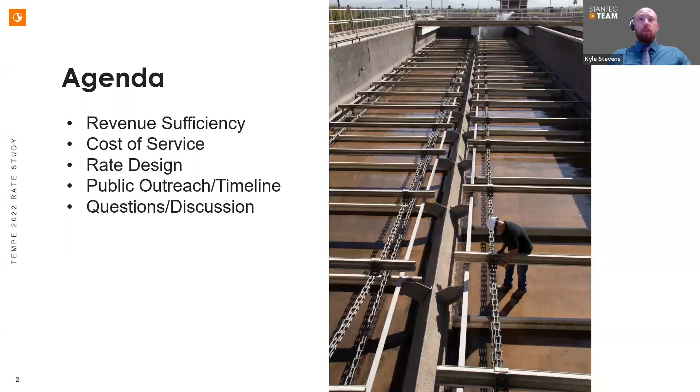Thank you so much for that introduction, Steve, and it's a pleasure to be here this evening. I want to run through a presentation we put together that really covers the rate study at a 30,000 foot view, and we'll dive into a few of the finer details. From an agenda standpoint, we'll be looking at the revenue sufficiency, cost of service, rate design, and then we'll cover the timeline of the rate study, public outreach, and then we'll open it up for discussion or any questions on the material covered this evening. So with that, I'll jump into it. This first slide really helps me tee up the issue of what is a rate study.

And I think one of the best ways to think about it is a series of interconnected investigations. So first, we're going to look into revenue sufficiency. That's a fancy way of saying how much does it cost? Water, wastewater, there are no tax dollars involved here. All of the revenues are associated with user fees.

And so we need to determine what are the total annual costs of running the system and also projecting that out over a multi-year period. So we'll be looking at 5 and 10 years into the future to see how those costs are anticipated to evolve over time. Once we've established that baseline, we'll move into the cost allocation.

And what we're really discussing there is from whom. So we have several customer classes set up on both the water and wastewater side. So examples are single family, multifamily, landscape, industrial, commercial. And what we want to do is look at the system's cost drivers and how those customers are impacting those cost drivers.

Next, once we establish the cost allocation, we'll go into rate design and we'll think about the different objectives that go into creating the actual rates and charges that show up on a customer's bill and generate that bill to collect the revenue for the utility.

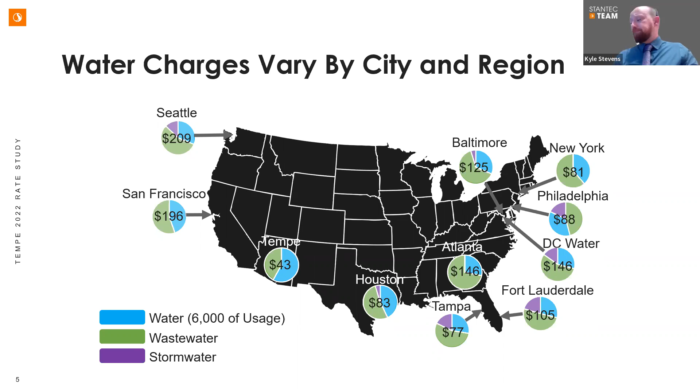We've got expenditures, vehicles, and specialized equipment. Some debt service associated with ongoing capital projects. As I mentioned, these are very capital intensive enterprises. We're investing in not only treatment plants, but also the large network of pipes that stretches across the community. And then additionally, we've got reserve contributions up there.

So we've got to consider financial policies. How much money should we hold in the bank at times? How much coverage do we need on debt? Things like that to ensure we're sustainable over time. And all of that adds up to the annual revenue requirement. And then we're going to take that and play it forward for 5 and 10 years to understand how those costs may change over time and ensure that rates are sustainable over that period and these services can be provided over time.

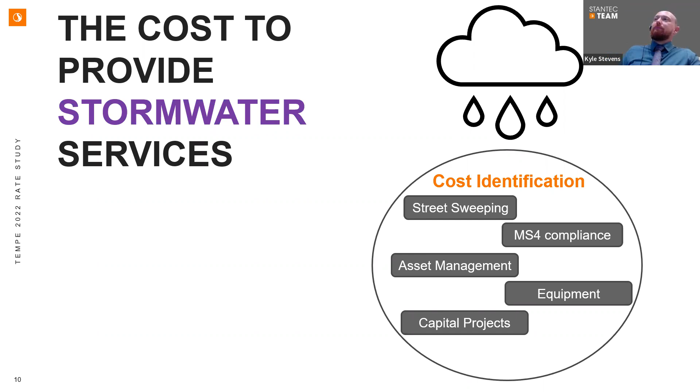Next, we'll move into the cost of service once we've established the revenue requirement. And the cost of service, this is a framework I'll talk about of how we'll be conducting this study. And we'll be following the M1 manual, which is essentially the industry standard of how to allocate cost for the water system into several different categories.

which are what types of demands the system is serving. So a water system from an engineering perspective is set up and stands ready to serve several types of demands. So one is known as average day demands. That's kind of the overall average demands in a year you can think of. But then on top of that, we've got to stand ready to meet some more peak demands. And so maximum day demands and peak hour demands.

Best way to think about these two are really some of the seasonal demands, especially on the Tempe system, that we see over the summer months, where customers oftentimes demand quite a bit more water than in other months of the year. And the system, again, has to be built and constructed to be able to supply those demands. So we'll be categorizing that amount of cost associated with that. And then finally, customer cost.

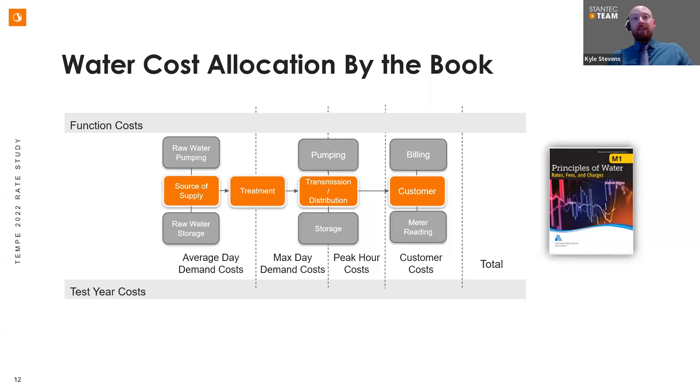With regards to wastewater, it's a little bit different, but very similar in the sense that we have a book from WEF, Manual 27, which lays out a framework for us to work through and think about the way that customers utilize the wastewater system. And so from a functional standpoint, there is flow, so the amount or volume of wastewater on the system, and then secondarily, strength, what's in the wastewater. The technical terms for strength are COD, chemical oxygen demand, and TSS, total suspended solids.

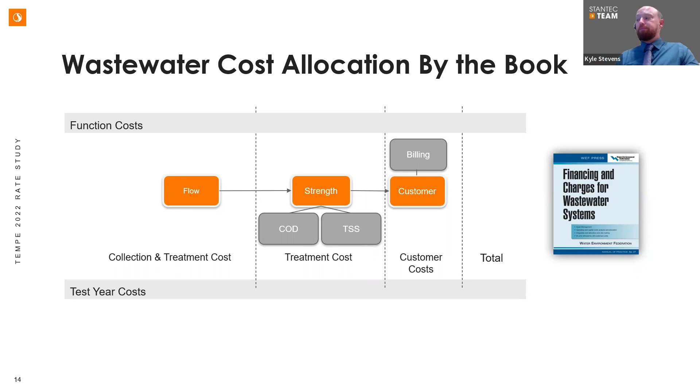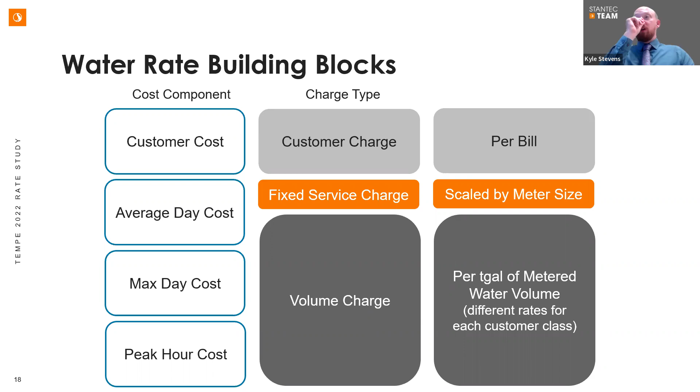With regards to how we actually bill the billing units for these two, a fixed service charge is typically going to be based on the meter size or the connection size to the utility system, and that's represented oftentimes in inches. So for instance, a 5/8 residential meter is a very common one in Tempe for a single family home. Commercial enterprises might have a larger meter because they're placing larger demands on the system. When we talk about volume, we're talking about thousands of gallons used within a monthly period. And that's how the bill is looked at and created based on the rates here.

So when we go to the next slide here, these are the current water rates that we're starting with as we move into this rate study and analyze any potential modifications or recommendations. And so on the left side are those fixed service charges I just talked about. An average home, as I mentioned, is a 5/8, that's $13.55 a month, but you can see the scaling here. So if you have a larger connection to the system, the thought process behind there is you can place larger demands on the system. And so the fee scales on a monthly basis. And these on the left, again, are before any usage on the system.

Then on the right side, we have a series of volumetric charges, and they vary by customer class. So within the single family class, there are 5 tiers that apply to usage. And what I mean by these tiers is, for instance, on tier 1, that is all usage in a month that's 6,000 gallons or less, and it's all billed at $1.90. Now, if you go above 6,000 gallons, you would fall into tier 2, and that next additional gallon would be charged at $2.91 up to 12,000 gallons. Once we go above 12,000 gallons, we then fall into tier 3, and if we exceed that, into tier 4 and 5.

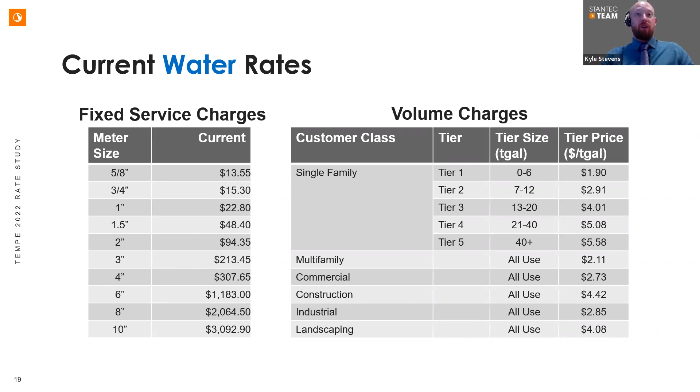With regards to the other customer classes, multifamily, commercial, construction, industrial, and landscaping, their rates are uniform rates for all usage within a monthly period, again, tied back to the cost of service that we were just discussing and the unique demands that those customer classes place on the system. With regards to wastewater, it's a relatively similar configuration. On the fixed service charges, they again will scale by meter size, the residential being a 5/8 at $10.30 a month currently. And then on the volumetric side, we'll have a series of uniform rates for each customer class, now thinking about the amount of volume, but also the strength that's in that wastewater.

Now for the single family, there are a few key considerations. Tempe applies a winter averaging program. What we mean by that is, for a residential household, your wastewater billing units are based on the usage in the water meter from January, February, and March averaged together. We take 70% of that. And then if it's above 12,000, we cap it at 12,000. All of those actions are aimed to ensure that we're trying to get out any irrigation or seasonal usage that may occur that's not going back to the wastewater system, and just trying to ensure that we're billing those customers as equitably as we can.

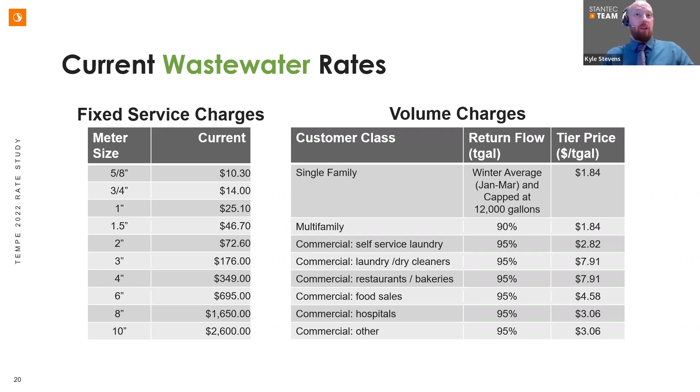And then you can see down below with multifamily, commercial, we have a number of different categories there that have different return flow factors and different rates per 1,000 gallons, again, dependent on that flow and the strength of that wastewater, which we'll be looking at in this study to update and analyze. Now, one of the things in a rate study that we always do is some benchmarking activities to understand how our services compare to other peer municipalities.

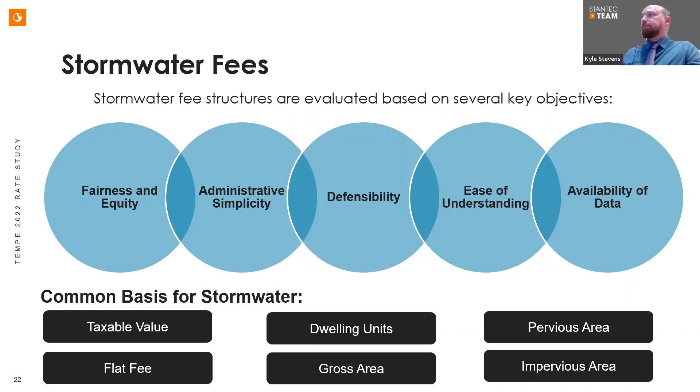Finally, want to just mention the timeline. So a rate study such as the one that's getting kicked off here the last month and this month is a multi-month process to analyze data and come up with results. We're currently in March and April, so we've introduced this study. We're in this public campaign today to really fundamentally solicit feedback and thoughts on the study.

And then we'll be moving into the May and July period where we'll be very analytically heavy, building models, looking at data, coming up with the modifications and recommendations to get ready for an August, September meeting where we can present the really salient findings of this study and provide public outreach to gather feedback on the recommendations. And I would also add at that time, we'll oftentimes be able to really help customers understand how the different modifications will potentially impact their bill.

And then finally, in November and October, we would have a presentation at a council meeting for the consideration of rate adoption, modifications to the rate. And if it's approved and adopted, we would then have an additional public outreach campaign to help customers anticipate the potential changes to their bill that will be forthcoming. And the earliest that these rates will be in effect would be January 2023.

And I would also add that we do through, I believe it's April 24th, have a public survey, online survey available for the residents of Tempe to go do and fill out and provide feedback that way as well. And so with that, I'll end the presentation, Steve, and I think we're going to open it up to any questions or discussion on the topic tonight.

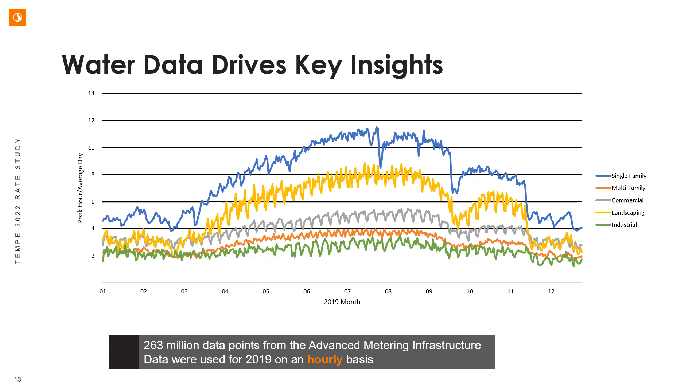Okay, another question. Is there any consideration for stormwater to be used for irrigation, non-potable water? That's another great question. I believe the city is considering a green stormwater infrastructure study master plan coming up in the near future. So that could be a building block on top of what we're considering as part of this rate study. But this being our first foray into stormwater and identifying stormwater costs, we don't have any of that type of infrastructure currently built into our cost identification, and those costs would have to be identified as part of that study.